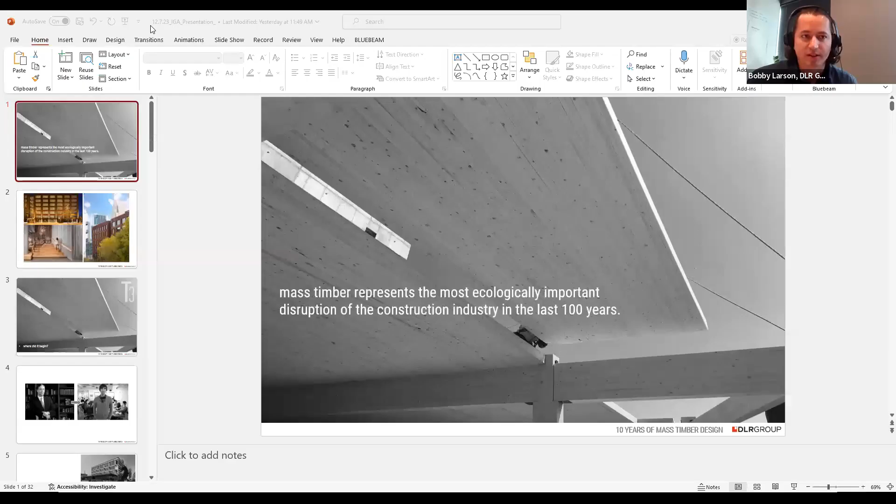Thank you, Twyla. Just give me a second to get my presentation pulled up here, and we'll get started. I'm really excited for this opportunity to speak with everybody today. I'm very passionate about the opportunities that mass timber provides to our industry, and I'm really excited that there are as many people as there are interested in it along with me as well.

Okay, giving you a preview. All right, so I'm going to start off here with a pretty bold statement: that mass timber represents the most ecologically important disruption of the construction industry in the last 100 years. There's been a lot that's happened in the last 100 years in terms of energy efficiency and new technologies that have improved our buildings. But mass timber is making an impact in a way that is going to be key to our future as we try to rein in global emissions. And I'll get into that as I go through my presentation.

Before we talk too much about that, I'd like to share a little story about myself. Ten years ago, I was living in Oregon, and I went and saw a project that I hope many of you are familiar with, the Bullitt Center, which was constructed in Seattle. That project was extremely unique.

It was built as part of the International Living Future Institute's initiatives, where they have their offices. It came together and they had to basically rewrite the Seattle code to make it work. It was pretty expensive compared to typical construction practices, but they did it, and it was an example of how construction could be.

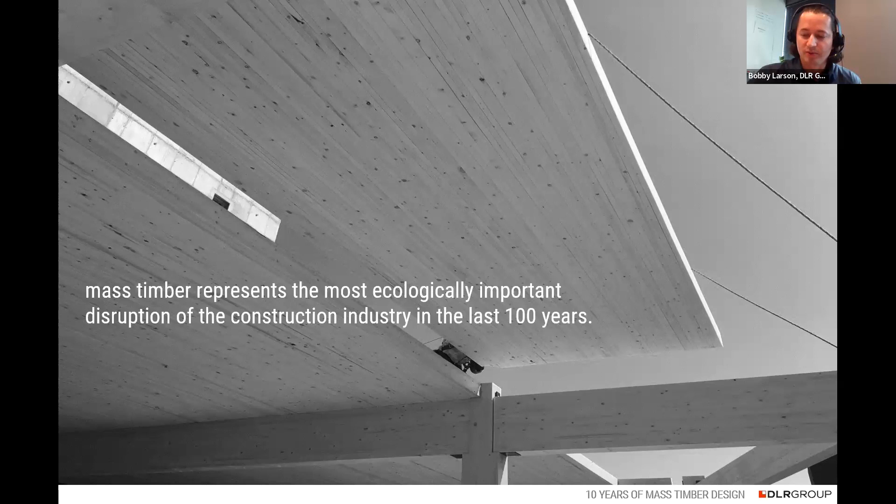But I moved to Chicago soon afterwards and started working for DLR Group, and was very pleasantly surprised to see that it was happening—it didn't just stop at that one building. Other people were seeing that as an example of what things could be, and the company DLR Group had just recently completed this project.

This is the T3 Minneapolis project in Minneapolis, which I think many people might be familiar with on this call. But I want to tell the story about this project a little bit too.

This came about as part of a change in office culture. It used to be that you had CEOs and lawyers who wanted to be in the central business district, on the top floors of a glass tower. There's this big shift in workplace design and companies, where instead of the old CEO who was all about prominence within the social structure, we have these hoodie-clad tech people coming out of college demanding a different environment for their workplaces.

At the same time, the client we were working for, Hines, was noticing a trend with a project they had in Minneapolis—this old loft building, pictured in the top right. What was going on is that it was one of the buildings that leased up the fastest. People would tour it, see the beautiful wood, and fall in love with its historic nature. But even though it leased up the fastest, it had some of the highest turnover.

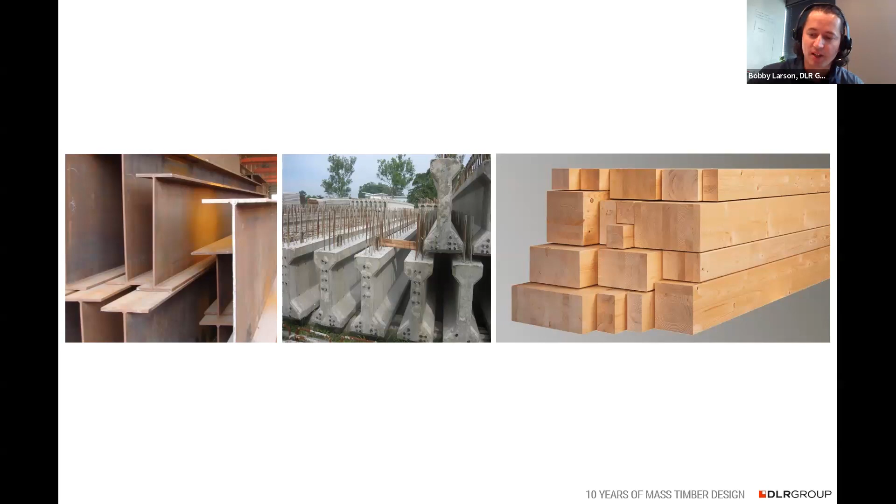So we're using this material, and as you know, wood is a renewable material—it grows naturally. It's very different from the alternatives we have for this size of building, like concrete or steel construction. It's important that as we design these spaces, we're taking advantage of both the aesthetics and the way these materials are manufactured.

One of the biggest advantages, which I'm sure a lot of you at this Illinois Green presentation are interested in, is the amount of embodied carbon we can avoid. Embodied carbon, a term I hope many of you are familiar with, is the amount of carbon it takes to manufacture, transport to site, and erect any given material.

On T3 Minneapolis, because we used timber instead of a concrete building, the total volume of wood used was 148,947 cubic feet, which sounds like a lot, but in North American forests, it only takes about 14 minutes for that amount of wood to grow.

So we don't necessarily need to worry about the fact that we're cutting down trees. We do have a substantial amount and it replenishes all the time.

That equates to 6,001 metric tons of carbon dioxide avoided, a lot of that being stored within the wood itself, and a large portion of that being the fact that the wood just takes less energy to produce than concrete or steel. That equates to almost 1,300 cars taken off the road for a year.

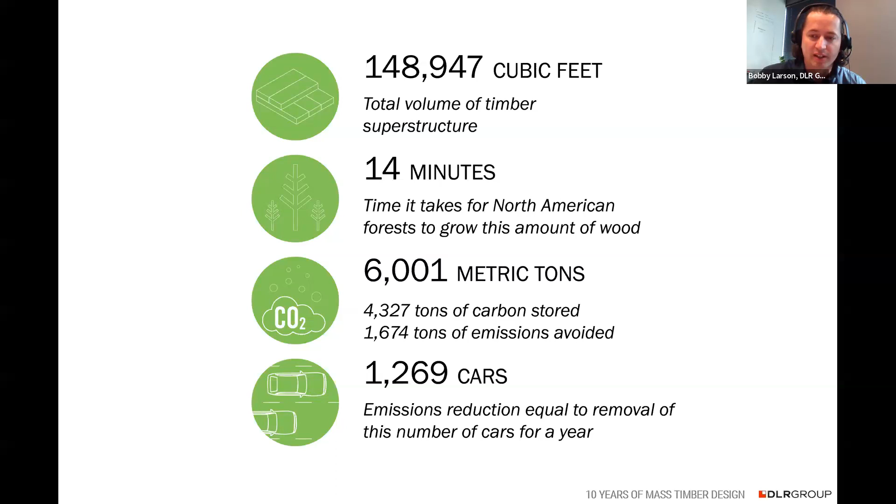When we designed this building, because it's in this historic area, we wanted to relate to that aesthetic. We wanted to make sure that we responded to this old style of punched openings and real natural materials like brick.

One interesting thing about timber that we discovered as we were designing it is that the heavy materials didn't necessarily work as well on our timber slab edges that we cantilevered past. So rather than trying to make the timber do something it might not be as well suited for, we ended up doing a lighter material - a Cor-Ten metal panel instead of the brick, just to leverage it for its strengths and not try to make it do something that it wouldn't do.

Here's a picture of the interior, and you can see that it would definitely differentiate itself from a typical office that might be leased out to somebody in Minneapolis. If you can imagine yourself walking through 6 or 7 spaces throughout the day and seeing concrete columns and concrete slabs, and then walking through this space and noticing the warmth and the color of the wood, and really feeling a difference.

Because of that warmth and color, as we design these buildings, we make sure too that the other materials that go against it follow that precedence of natural patterns and beauty. You wouldn't want to put a fake material up against your wood column because it would really show off how fake it was. So on this project, we used other natural woods and other materials that had patinas like board form concrete and blackened steel.

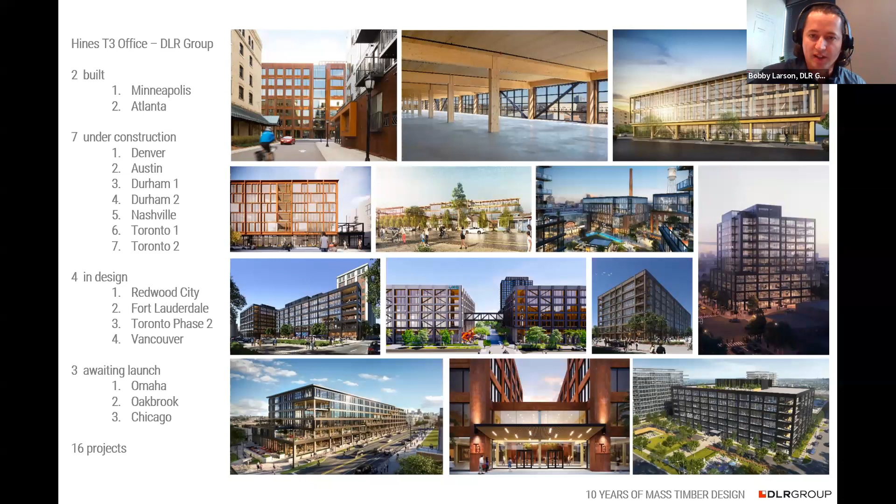The title of the session that we're in is Timber High Rises, back in Chicago. And that wasn't always necessarily the case. One thing about the code that we were always running into is that there's a height restriction on the timber. If you're familiar with the building code, the high-rise designation occurs after you're 75 feet above the highest occupiable floor, and the timber height restriction that we had was that we could only build up to a maximum height of 85 feet. So we're technically still mid-rise buildings, but it's very interesting to see that as this project has been more adopted and shown up in more places, the timber codes have been evolving to recognize that we're doing these buildings in new ways, in safer ways than they were done 100 years ago.

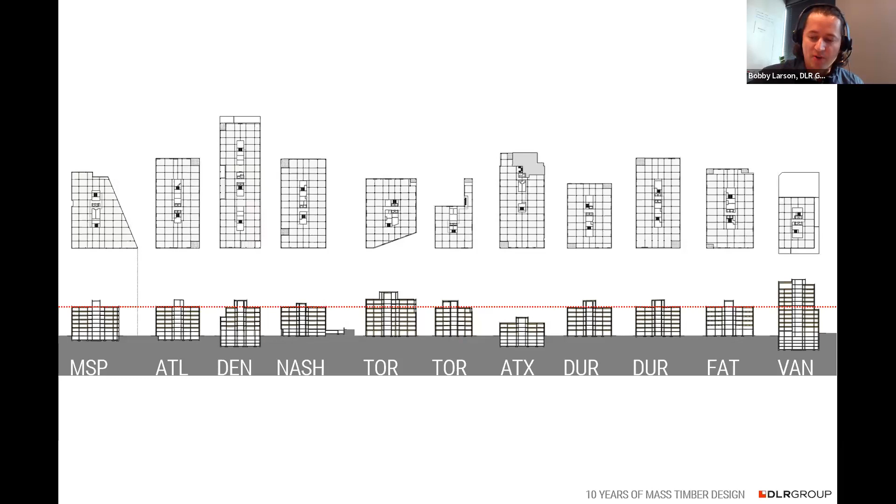We're going to start seeing a lot more projects like the tower in Milwaukee, the Ascent Tower, and the towers that HPA is going to present on that are 18 stories tall, 20 stories tall, however it may be. You know, these are possibilities that are opening up for us.

When we're talking about mass timber, we're talking about something specific. In the code, it talks about heavy timber, and it talks about mass timber a little bit too. If you look at the code book, it says HT construction, which is in itself kind of historic. Heavy timber references solid cut wood.

You take a log, trim the sides off, and you have a solid square piece of wood—that's heavy timber. Mass timber is something that came about more recently, though it's not new. I'm not sure of the exact date, but about 50 years ago people started gluing wood together to get larger pieces. That helps because you don't have to cut down gigantic trees to get big beams; you can use smaller trees instead.

So you have glulams used as beams, which are just glued together, and there are other products as well. Both the Bullitt Center and our T3 Minneapolis project use something called NLT, basically 2x8s stacked on end and nailed together—I don't know if anybody still makes that. They've advanced that process a bit more with a product called DLT, which doesn't have any nails; instead they ram wood dowels through the 2x8s to make a solid panel. The most prevalent product on the market is CLT, where they take wood pieces and, instead of standing them on end, lay them in a crosshatch pattern and glue them up to make big, massive panels for building elements.

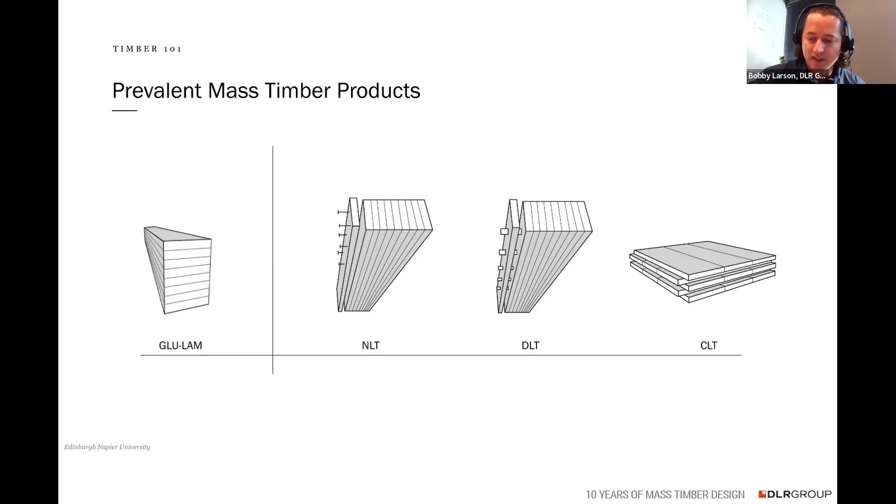The next project I want to talk about is T3 West Midtown, which we finished a number of years ago. It followed a lot of the same criteria as the Minneapolis project—we wanted to put it somewhere it made sense. It's in an area of Atlanta close to transit, on a site that used to be an old steel mill. You can still see that flue out in the park in front of the building, a remnant from that history.

So it has this industrial heritage a little bit. We designed it to the limitations we had, which was 7 stories tall—the bottom out of concrete, and 6 stories of wood on top of that concrete podium.

We continued to develop our tool set and worked on ways to integrate the MEP to keep it from diving too low underneath beams and things like that—something we needed to think about in the design of these buildings, to make sure we aren't leaving a big cobbled-together mess at the end of the day when people lay out their interior fit-outs for these offices.

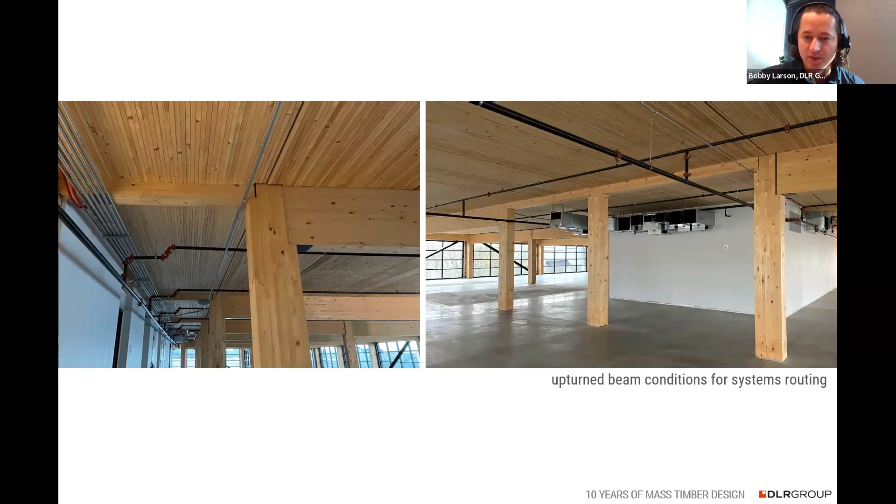It comes together piece by piece, all digitally fabricated and ready to be placed. It can be faster, quieter, and doesn't necessarily require as many people to put up. So there are advantages to that in the construction process.

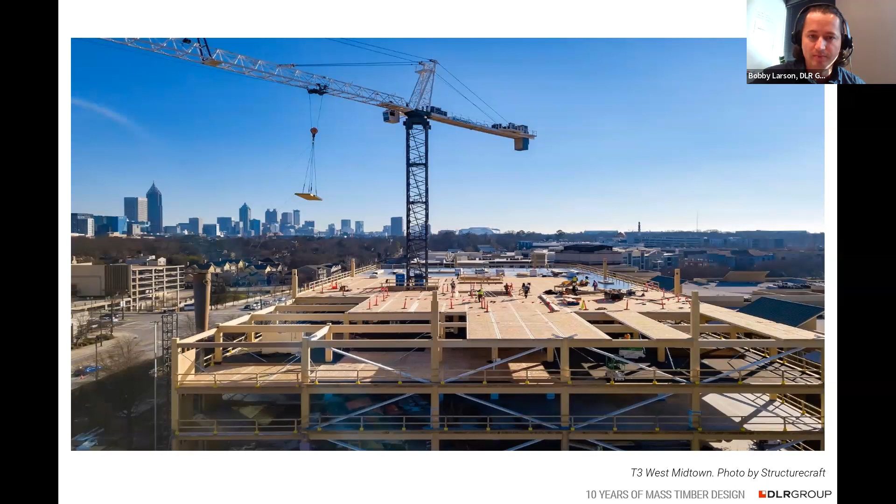But now I'd like to talk a little bit about the big environmental benefits we have from using wood. To really tell the story of wood, we have to have a good understanding of the impact of the built environment on the climate situation we have.

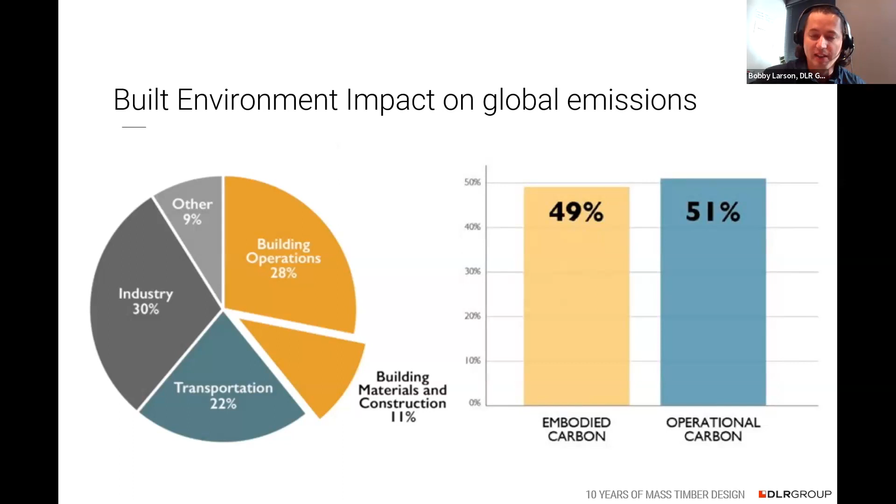On the right is a little bar graph, also interesting to see. This is for one typical building. When you look at the lifespan of that building, the portion of its carbon that's embodied—built day one—is 49% of the total emissions of that building, compared to the operational carbon, nearly half. It's something we haven't talked about as much as we should have to date.

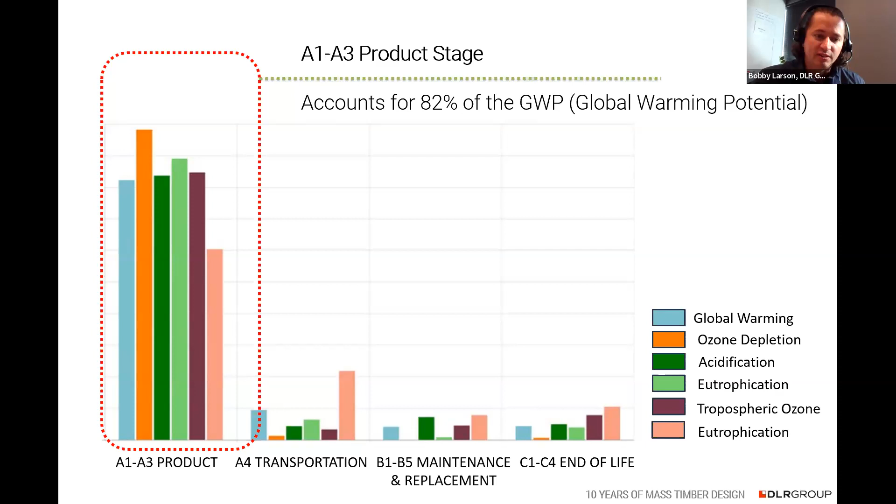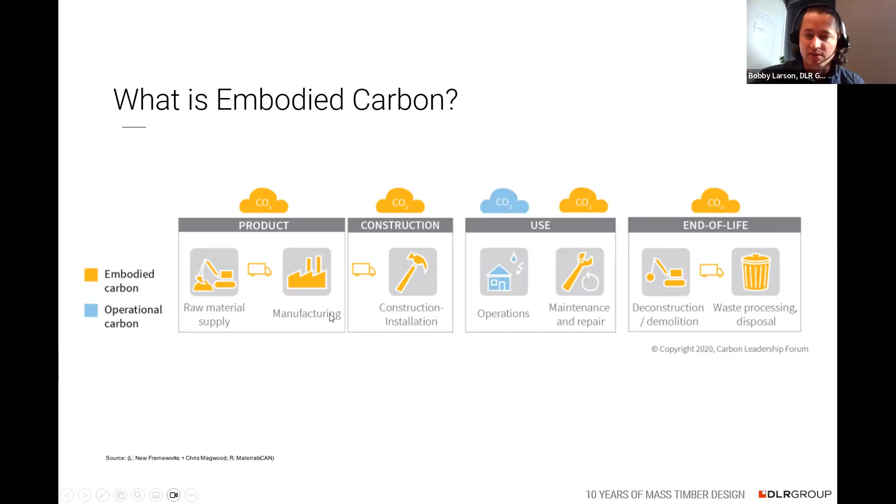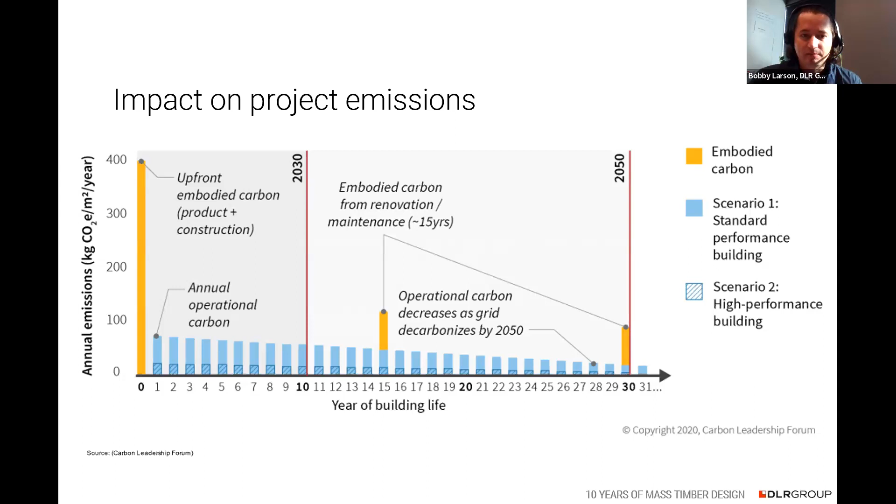Wood in and of itself is also a very interesting material because not only does it take energy to grow the wood, cut it down, mill it, glue it together, and put it in your building, but wood is also 50% carbon by weight. That's the carbon that trees take in during photosynthesis and store within the wood structure. This carbon is something we refer to as biogenic carbon.

In a long-term life cycle, you would plan that at some point the wood would not be in the building anymore—the building would fall down or get torn down or whatever it was.

Those beams would sit somewhere, rot, and all that carbon would be released into the atmosphere. That's not necessarily the case. If we take a look at Chicago, we talk about mass timber buildings coming back there. There are tons of beautiful old loft buildings in Chicago that have been standing for 100 years. It's not a 50, 60-year timeline for these buildings. These buildings are well-loved and people see the value in them.

Instead of that wood rotting and being released into the atmosphere, new trees are planted in its place, and those trees take in more carbon. So depending on how you run your numbers, you can actually see a net reduction in your embodied carbon from wood, not necessarily adding to it, as long as we're managing our forests correctly and reforesting at the time we're cutting down the trees.

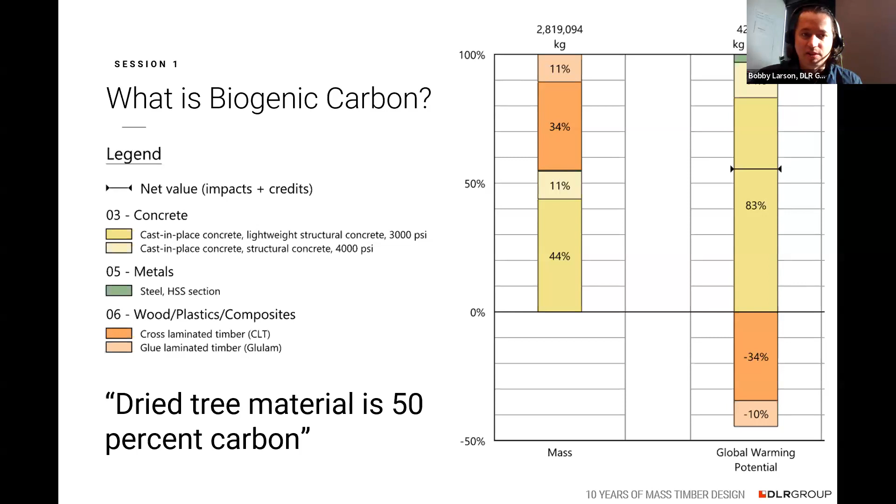The U.S. Forest Service understands that cycle. They're saying we're not bad guys for cutting down trees, and the reason is a forest in its natural state is basically carbon neutral. The trees will grow, eventually die, or get burned up in wildfires, releasing that carbon into the atmosphere. That's very different than pumping 650 million year old trees out of the ground and burning them in our cars.

That carbon was going to get released anyway, so we don't feel bad about cutting down those trees and using them to make paper or furniture, or even burn them to generate electricity. We're not adding additional carbon into the system, we're just utilizing that same system. Some people ask when we give these timber presentations, isn't it bad to cut down trees? There are some impacts, but as long as we're doing it responsibly, there are huge benefits from doing so.

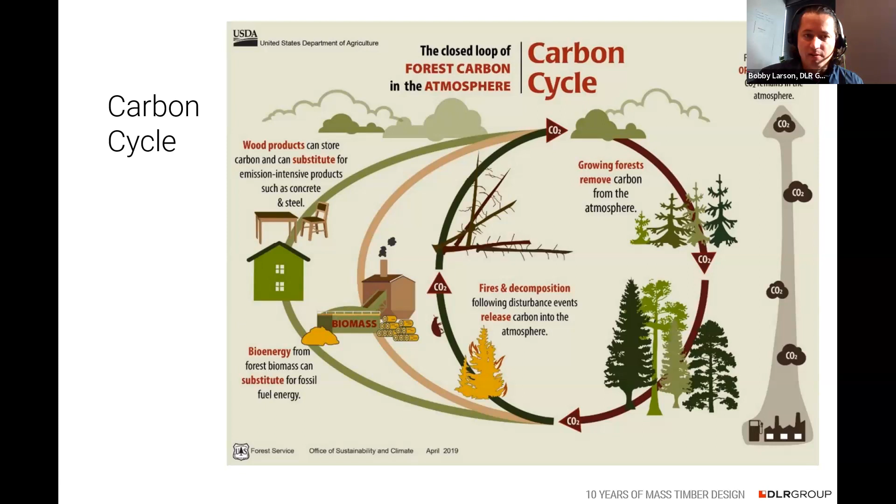In this whole process, if our goal is to create an environment where we're not doing negative impacts to the world we live in, there's this idea of a total carbon calculation where you're not just looking at operational carbon or the energy you use, but also the carbon in your materials. You'll always have some embodied carbon in what you build. Imagine a building that's net positive, producing more energy than it uses, and slowly over time that energy offsets the embodied carbon of the building.

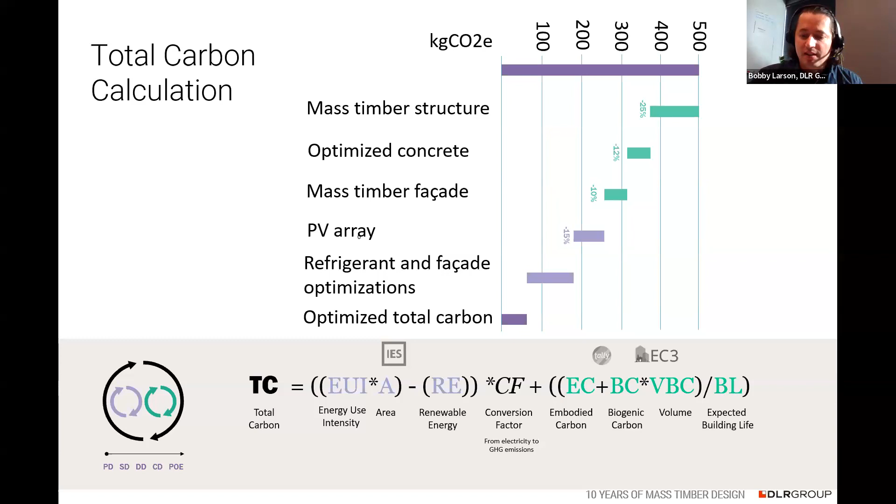To do that effectively, you need to make sure your embodied carbon is low. So you build out of mass timber or other low carbon materials, optimize your energy, and have a net positive building. In doing so, maybe it's possible that we can build regenerative buildings that are not harming the atmosphere or the environment where they're placed.

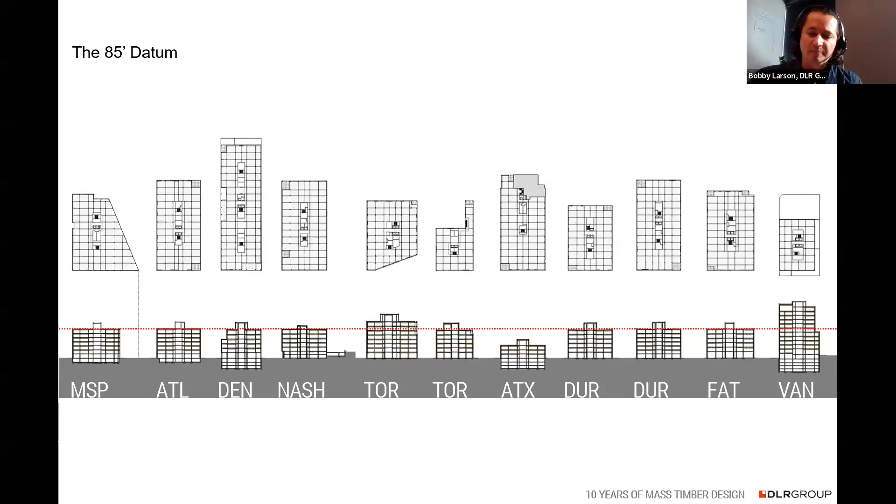So here's that diagram again, showing the limitation to the office buildings we've been working on. Let me touch on this quickly, but things are changing. This is how we stacked those buildings up before. We've got this ground floor of concrete, because wood buildings in offices used to be limited to 6 stories, and we were able to get 7 stories within 85 feet. But the new codes, the 2021 and especially 2024 codes, are allowing us to build taller buildings and open this construction type up to more places.

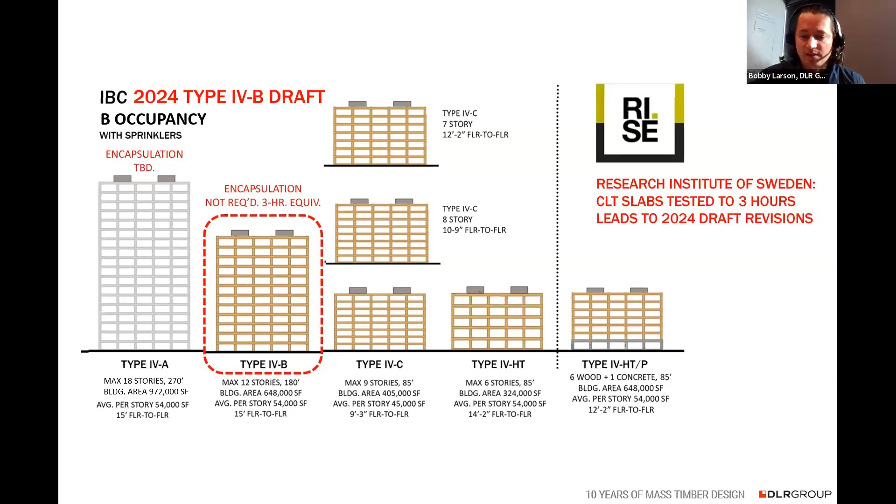Instead of areas where it only makes sense to build 7-story buildings, we're now able to build in areas where 12 to 18-story buildings make sense. Those are the possibilities we have for the future, and my company has already started to explore that in a number of locations.

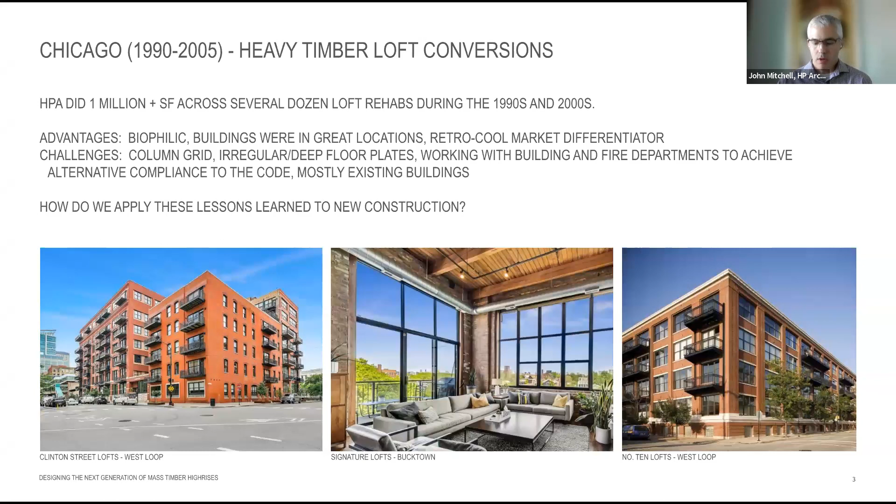Mass timber has plenty of advantages, and I'll run through this quickly since some has already been covered. The structure is the finish. We can erect these buildings very quickly, getting speed similar to concrete—and concrete in Chicago is legendary for being very fast, the crews know what they're doing. We can achieve similar speeds with mass timber, and we get to do that without shoring, so all the other trades can follow quickly behind. There's also carbon sequestration and biophilic design qualities—you can see that in the heavy timber loft building image, built using mass timber members constructed within the plant. Another key feature is we're less reliant on old growth forests; we can build these pieces up with 2x members rather than cutting down 200-year-old trees.

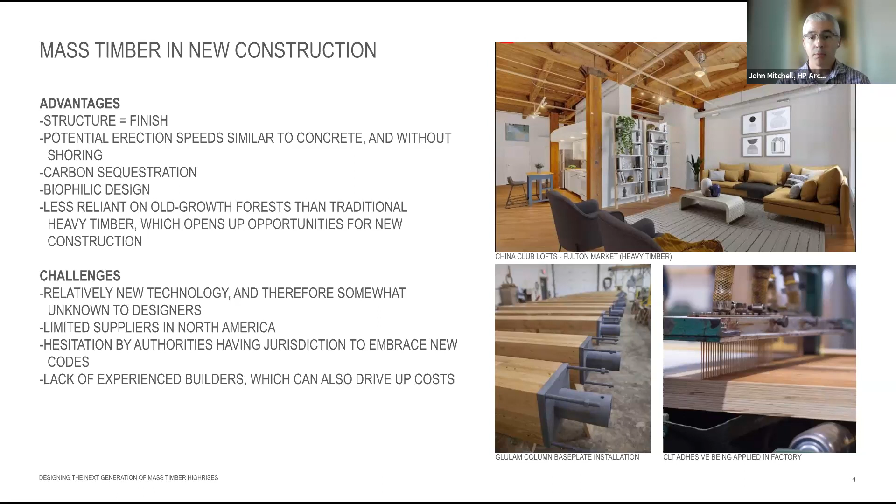But there are challenges that go with this. It's still relatively new, particularly here in the United States—we're playing a bit of catch up relative to Europe, which has been doing this for a lot longer. It's still a little unknown to designers, there's a limited number of suppliers in North America, and there's some hesitation by the authorities having jurisdiction to embrace these new codes and building types. There still aren't that many experienced builders—it's increasing, but we're not yet at ubiquity, and that can tend to drive up costs.

It's a free and very easy to use resource that helps quantify a project that's already done, or a project you're thinking about, and what that means in terms of carbon sequestration. We've used this on several of our projects, and what we found for the residential projects we do is that for every unit of housing in mass timber, we're getting the equivalent of taking 5 cars off the road for a year, or the power to operate 2.5 homes per year. We find that's a helpful, not terribly scientific, but useful metric to help explain how this can actually move the needle.

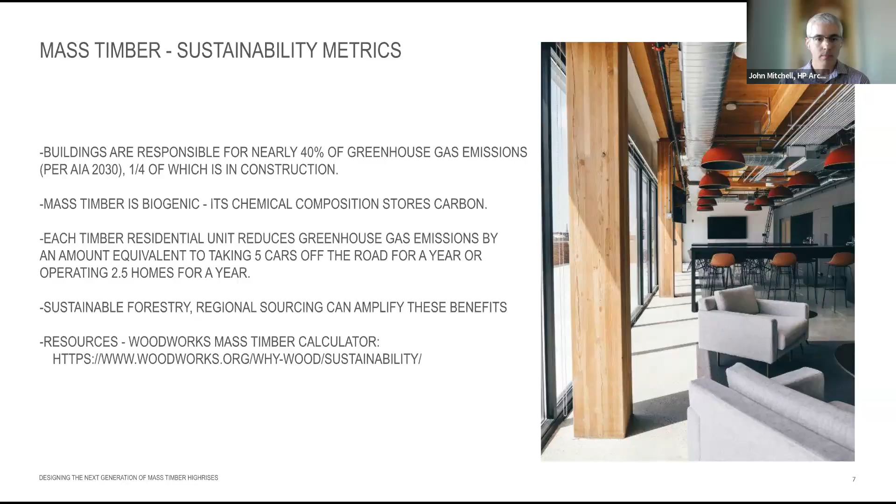Okay, so we've talked about the sustainability aspects, the qualities of mass timber, some of the origins with heavy timber, and how we translate that into now doing new construction mass timber buildings, and how we can do that at scale.

But to be a viable option for high-rise development, we've found that mass timber needs to answer 3 very important questions. There are others, but these are the 3 we've found most important. Number 1, is it safe? Not safe as architects define, but as defined by the AHJ, by the developer, by the market. Number 2, do we have codes in place that allow us to do the types of buildings we want to do? Can we do a building that we would otherwise do in steel or concrete, out of mass timber? And number 3, which might be the most important, how do the financial metrics work? Does it pencil? If it doesn't, we don't have a project. And I think given the current market climate, we all feel pretty acutely that the financials really have to work for these projects.

Let's talk about question number 1, which is, is it safe? Bobby touched on a few of these tests, so I'll just recap them pretty quickly. I want to highlight the first one.

The USDA compartment test, done in 2018, is the backbone for the 2021 IBC code provisions. All of what you see in the 2021 code is based heavily on the results of those tests, plus some factors of safety. The next big jump is the RISE test, from the Research Institute of Sweden, done in 2021. That made a big jump as a data point showing that the char depth, the black area of the timber you see in the bottom left image, is as effective as gypsum board encapsulation in preventing reignition or flashover. So what they found is that the fire just puts itself out. It doesn't keep burning until there's no wood left.

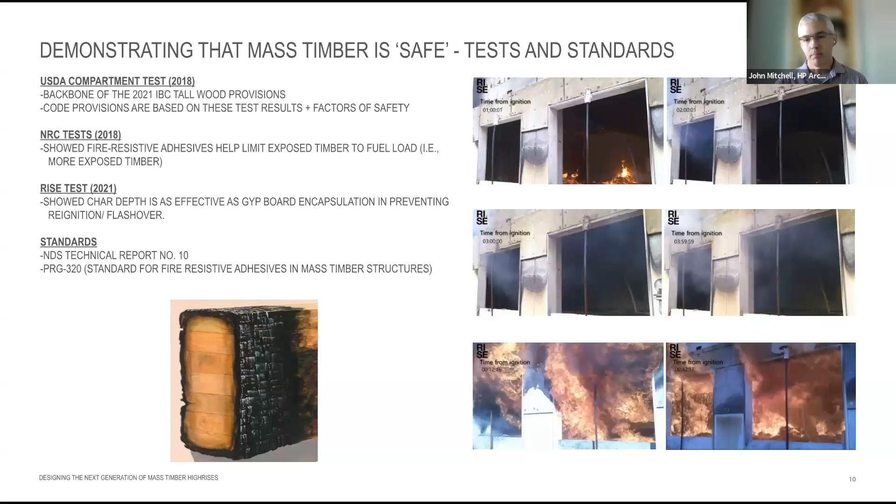Two other important resources and standards to be aware of when working with mass timber: one is the NDS Technical Report Number 10, the National Design Specification, which provides standards for designing with mass timber. The second is PRG 320, a standard for fire-resistant adhesives in mass timber structures. That one in particular has come up quite a bit in our conversations with local code authorities and fire departments, demonstrating that the glue is just as robust as the timber, so the pieces don't delaminate and fall off during a fire situation.

The next step is proofs of concept. Have there been buildings built that show we can do mass timber, and do projects that actually make sense? And the answer is yes.

Right here in Chicago, we have 1038 West Fulton on the left, a project we completed back in 2019. At the time, it was the first new construction large-scale mass timber office building in Chicago. At 29,000 square feet, which compared to the rest in this presentation is actually pretty small, but it was a link in the chain, and a necessary one. Because what this project proved, and part of what we were doing in our conversations with the Committee on Standards and Tests, was that mass timber can be considered equivalent to heavy timber in fire situations.

And then the building on the right, the Nashville Warehouse Company in Nashville, we had a very similar conversation with the city of Nashville about proving that equivalency of mass timber to heavy timber in fire situations.

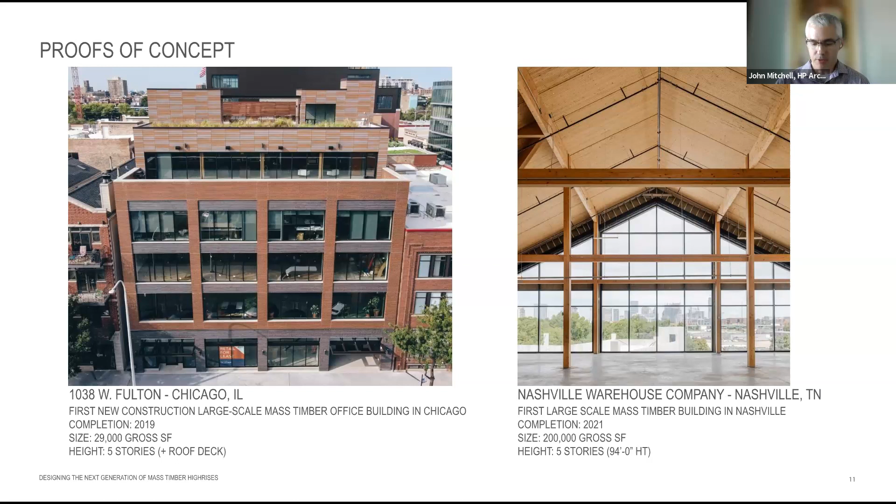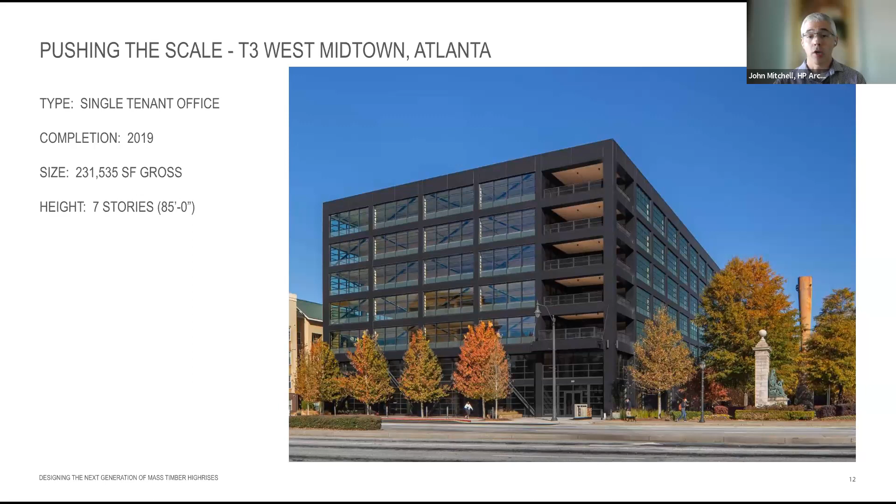From there, we go to pushing the scale. I'm not going to touch on this too much because Bobby covered this pretty thoroughly, our project in T3 West Midtown in Atlanta that we collaborated with DLR Group on. This took mass timber about as far as it could with the codes that were in place at the time.

Speaking of those codes, we have the 2021 IBC. This becomes a quantum leap in what designers could do with mass timber. This is the first time where we can break through the ceiling of 6 stories and 80 feet, and we can actually do high rise.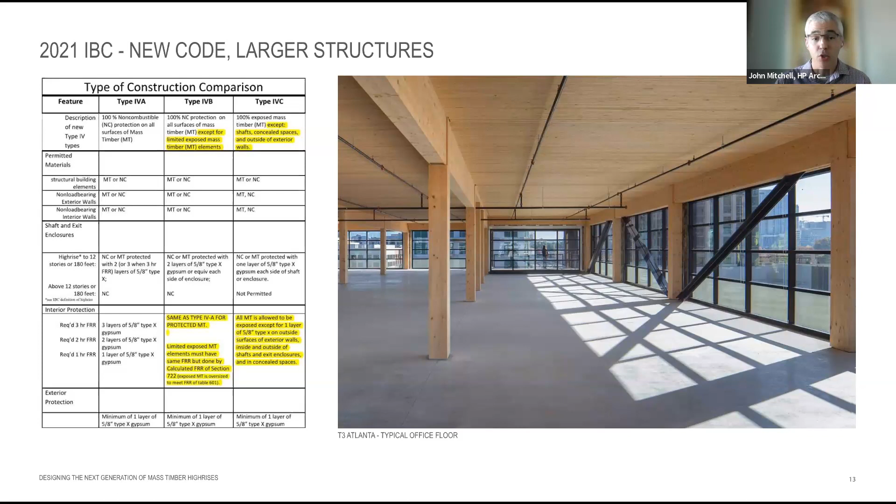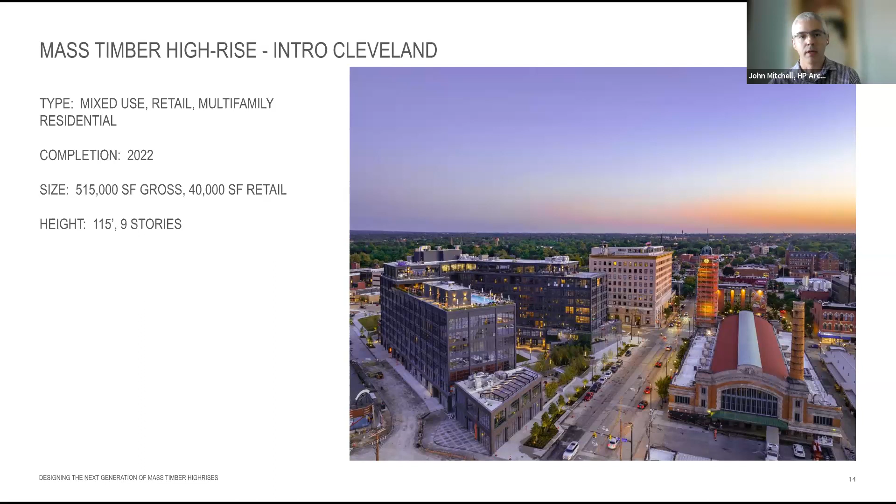One of the first true high rises is Intro in Cleveland. This is a project of 9 stories and about 500,000 square feet of gross area. This used the 2021 code as a starting point for the scale, for the hourly ratings, for the amount of exposed timber.

It was an 18-month process with the city to get this approved. We started in concept design, and we engaged a code consultant who was actually part of the ad hoc committee that wrote the 2021 IBC code. There were several life safety enhancements that we used to achieve the added height, because Ohio did not have the 2021 code in place at the time. So we were kind of blazing a new trail with this.

To get that height, to get that added exposed timber, we incorporated non-combustible vertical egress components, so concrete stair and elevator cores. We added more drywall encapsulation of the timber in the corridors. And then all of the timber, regardless of whether it's encapsulated or not, is sized for a 2-hour rating.

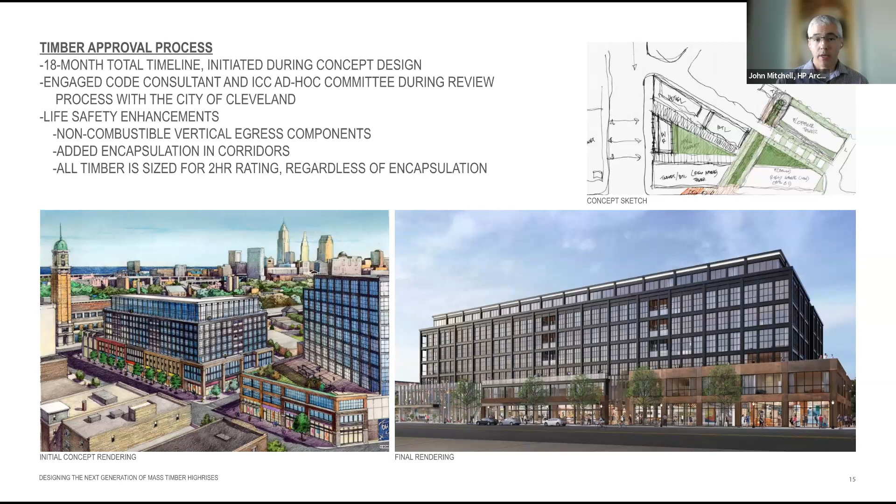We learned a ton on this project. We could probably spend an entire seminar just on the lessons learned. I'm going to highlight a few really quick. Number one, the timber fiber volume is a primary, not the only, but a primary cost factor. So if we can keep those fiber volumes low, timber cost comes down.

Secondly, we want to align the ideal residential floor plate with the ideal timber grid. So if it's a concrete or steel building, we'd be talking about 25 to 30 foot column bays. We'd be talking about a 70 to 75 foot deep floor plate. And how do we marry that up with the ideal timber grid, which really wants to be around 20 feet on center? Early on, we worked with our structural engineer partner, Forefront, on this project, and it's critical that you get that structural engineer on board early.

Last is timber buildings are mostly hybrid buildings. There's not really an all timber building. We had to do concrete stair and elevator cores, but we wanted to do them anyway because concrete does great with lateral forces. So we found a way to do that as a hybrid building.

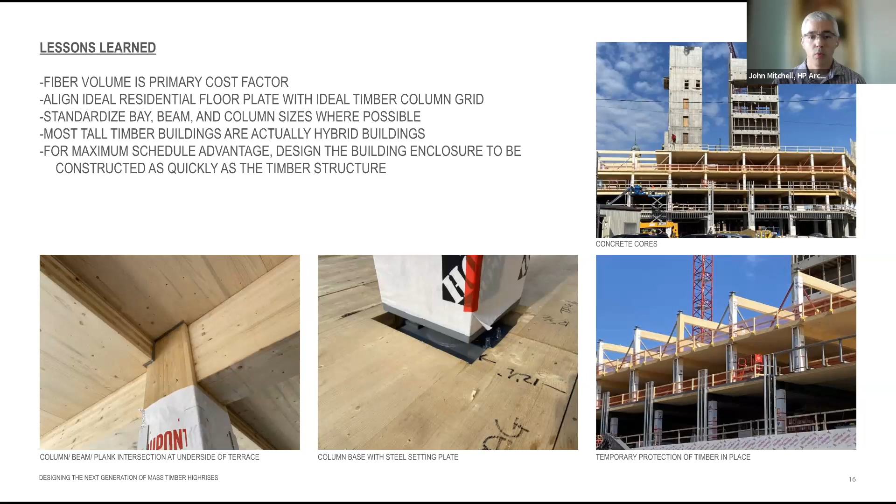And then the last thing is, for maximum schedule advantage, we want to design the building enclosure to be constructed as quickly as the timber structure, which is going to come into play when we look at some of the buildings in the future. How did this building perform?

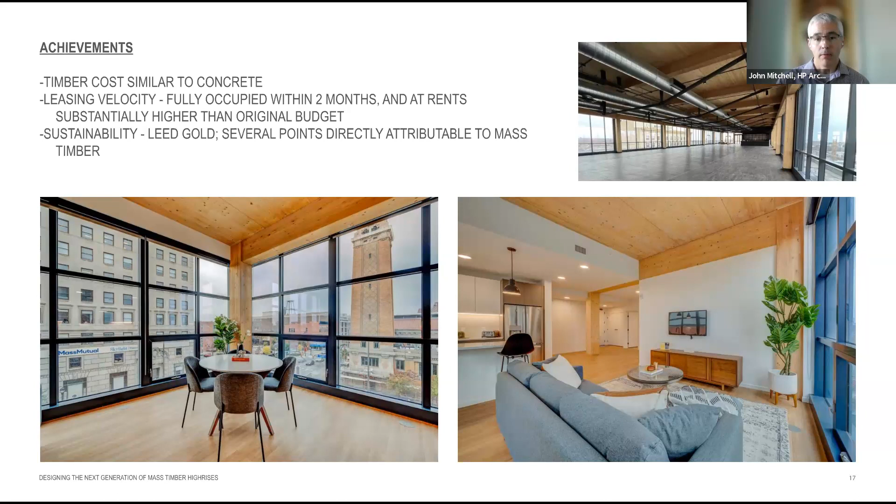Well, it did great. The timber cost ended up coming in about the same as concrete. So if we can do it in concrete, we now can prove that we can do it in timber. The leasing velocity was very fast. We were 100% occupied within 2 months of opening, and the rents were substantially higher than what our client Harbor Bay had pro forma'd. And then sustainability, we hit LEED Gold, and a lot of that is attributable from mass timber. And the building looks beautiful.

So let's come back to those 3 questions. Is it safe? I think we can say yeah, it's safe. Number 2, do we have a code in place that supports the desired scale? Yes, and I'm going to put an asterisk by that because of the buildings that we're working on next. And then number 3, do the financials work? I think absolutely they do.

So what do we do next? We're going to look at 3 projects very quickly, because I know I'm running out of time here, that are on the boards, that are under construction, or that are going to be under construction in 2024.

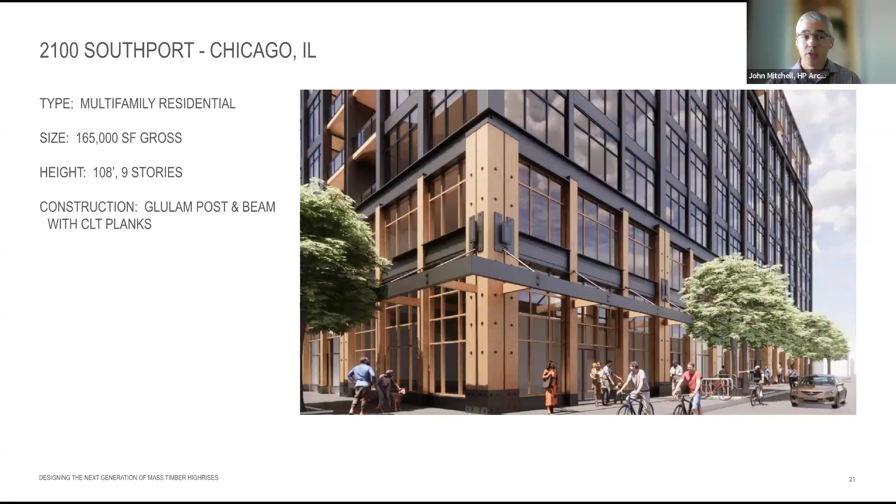That gives us a look into where this is going. One of them is 2100 Southport here in Chicago, a 9-story, 165,000 square foot building that has been approved by the Committee on Standards and Tests. This is now the first building in Chicago approved for over 6 stories, over 80 feet—a true high rise in the city of Chicago. We used the playbook we had established with Intro and applied it here in Chicago.

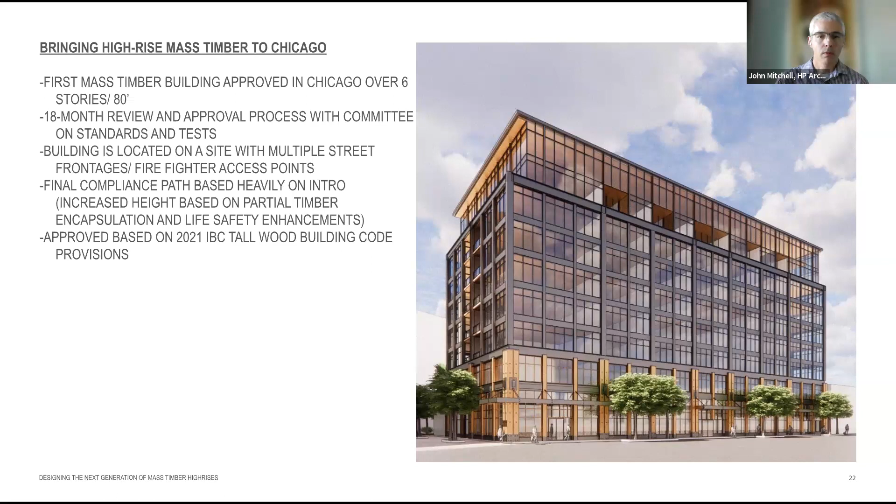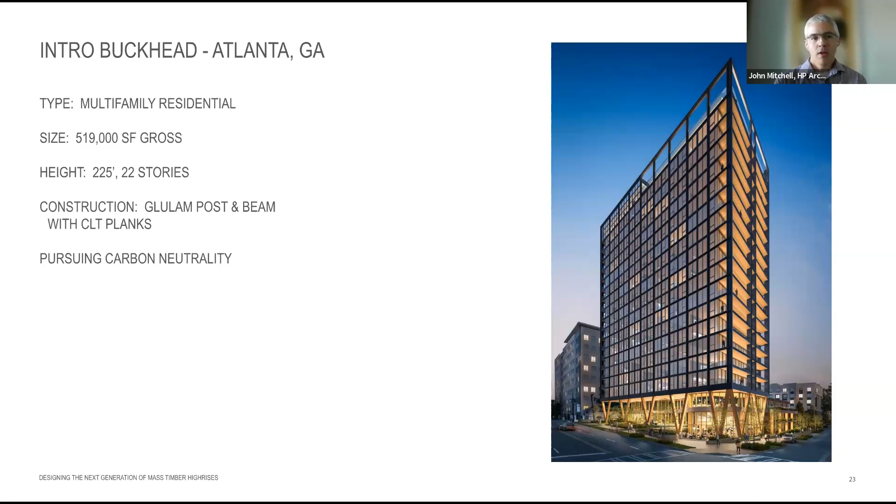Next up, we have Intro Buckhead, which is in Atlanta, Georgia. As the name implies, Intro is another collaboration with Harbor Bay and Forefront Structural Engineers. This one is taking the same size of project as Intro, and instead of being 9 stories, we're stretching it all the way up to 22 stories.

One of the beautiful things about this project is that the 18-month process we had with the city of Cleveland shrunk to 9 months, because we walked into that first meeting with the Atlanta code officials and they were gung-ho about this project. They had seen what we had done in Cleveland, and we had that instant credibility—we could point to a project that had been done, there was a project team that had done it, and we were all together meeting with them. So there was that credibility, that authority we could bring to the table right from day one.

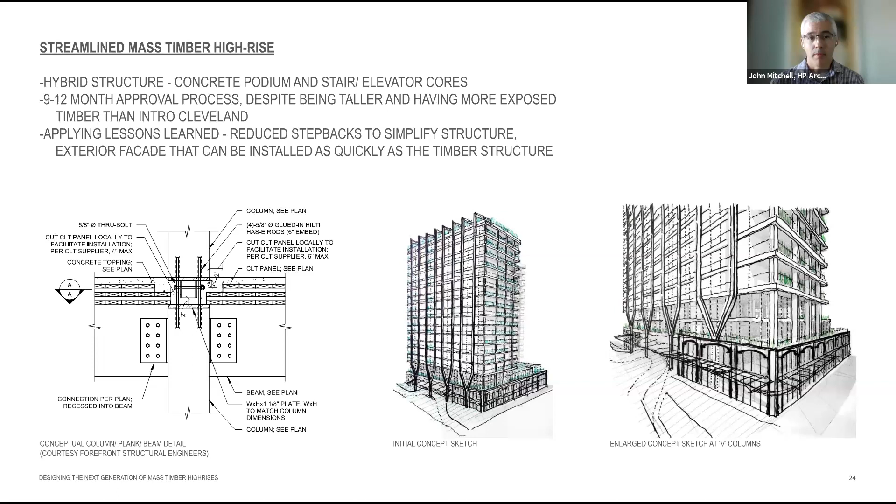And with this one, we're applying a lot of lessons learned. A couple of them: we're reducing the step backs to simplify the structure. It's a high rise, so unlike the wedding cake of Cleveland, we're repeating our floor plate and incorporating a window wall system that can be installed just as quickly as the timber structure.

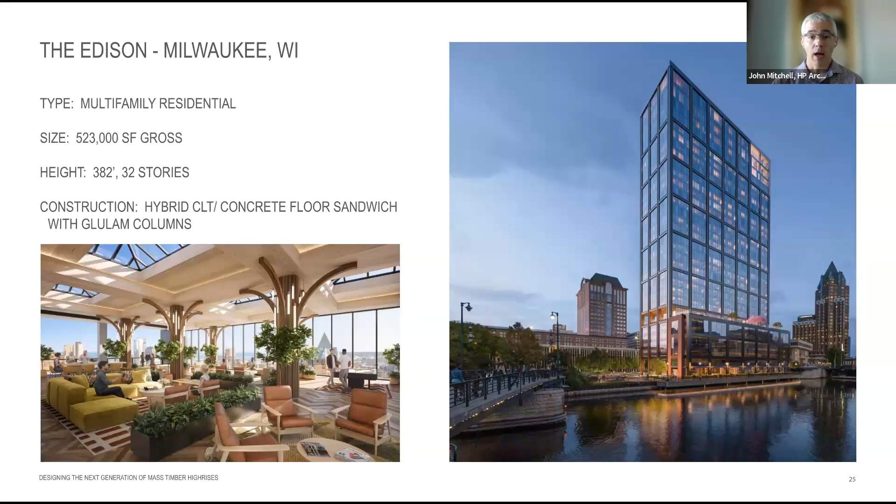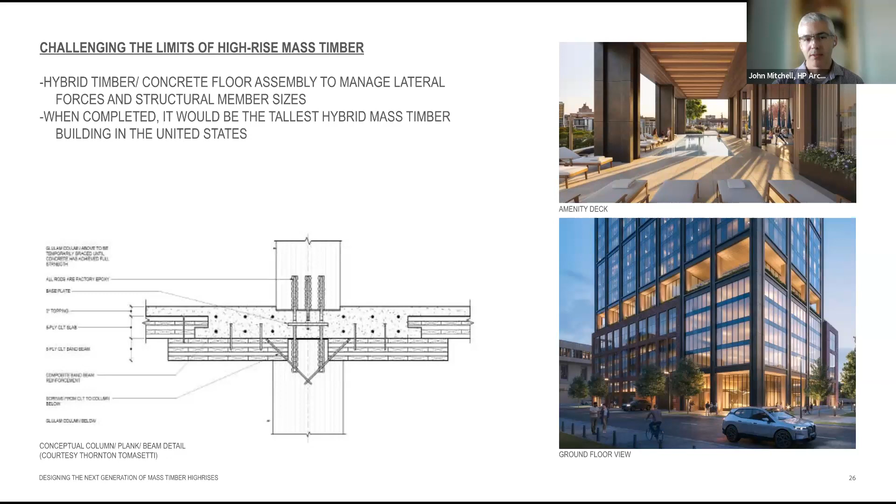And then the last one is the Edison in Milwaukee, and you may have seen some publications about this in the news recently. This, when it's done, will be 32 stories and probably the tallest mass timber building in the country when completed. Because we're getting above that 20 to 25 story height threshold, it's much more reliant on providing a hybrid system to manage the size of those timber members. So we end up with a hybrid concrete timber floor assembly just to keep those fiber volumes down. Again, when it's done, it will be the tallest hybrid mass timber building in the United States. And so as I close...

I just want to point out that you might have noticed some of these newer buildings don't look too much different from a concrete or steel building you might see, at least from the scale, the massing, the outward appearance. And I think that's okay—I think that's part of the goal, because we need to find ways to take what we're doing now and make them better methods, better materials, less waste. Having gone through these projects, I think mass timber is absolutely part of that and can be something that, done at scale and with volume, can actually move the needle in terms of sustainability.

And now that I've gone completely over my time, I will kick it over to Jason to lead the Q&A.